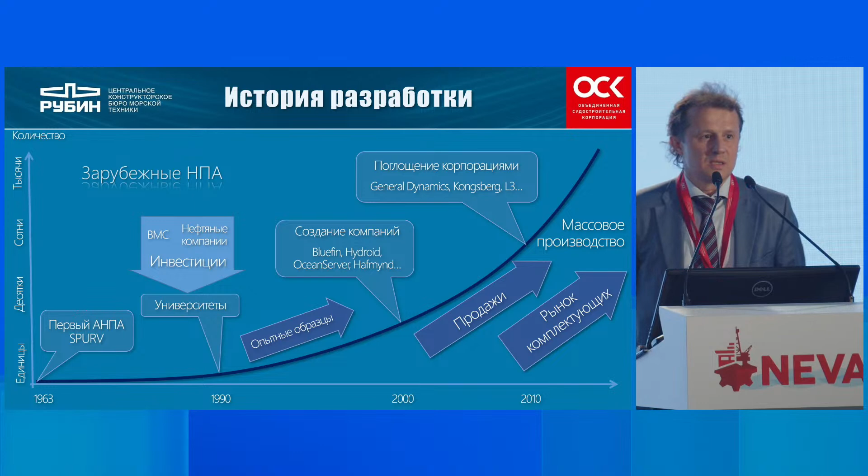And today, 30 years after, robotics in the marine industry is already a commercial industry. We have first designs, we have developments, and today those satisfy the demands of ministries. Today we've got General Dynamics, Kongsberg, that have accumulated international experience in a variety of areas. So these images are very well known to all of you. All of these facilities and machines are already in commercial production.

Likewise, in any other areas, Russia is lagging behind by a decade. Approximately, the founding father was a member of the Russian Academy of Sciences, Ageyev, who worked in Vladivostok in a respective research center. For the next 30 years to follow, this center was the only designer and specialized center for these technologies.

In the end of the 80s and 90s, remotely operated machines were developed, and some time after, when more research universities were involved, after 2010, we started to explore this topic jointly with our partners like Rubin, Electropribor, Aurora. All of those are very well present in the market already, and we are exploring technology today.

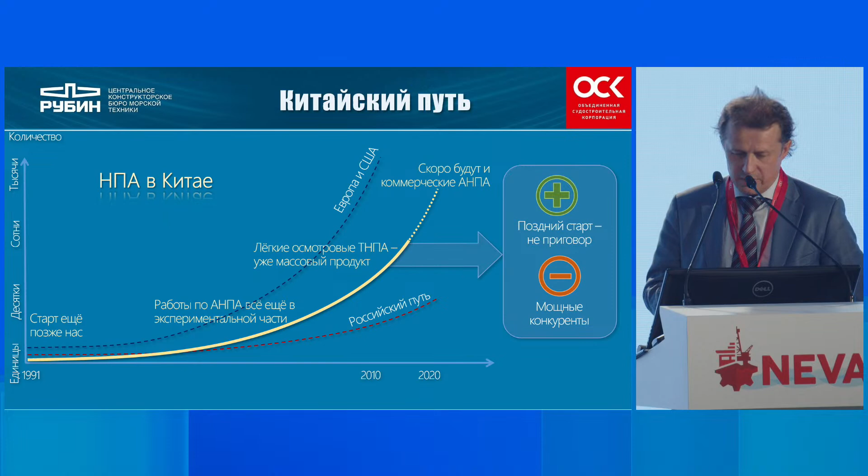So what's going on now in the world globally? What do we see now? As the previous graphs showed, everything starts from makeshift designing that then turns and expands into some kind of a commercial project. And once this commercial project expands to an industrial level, then the cost of commercial robotics is lower than military robotics, because we understand that the safety, the resilience, the robustness is different there. Therefore, the advancement of military technology versus what we used to have 30 or 40 years ago is based on commercial technologies. This is what's going on internationally.

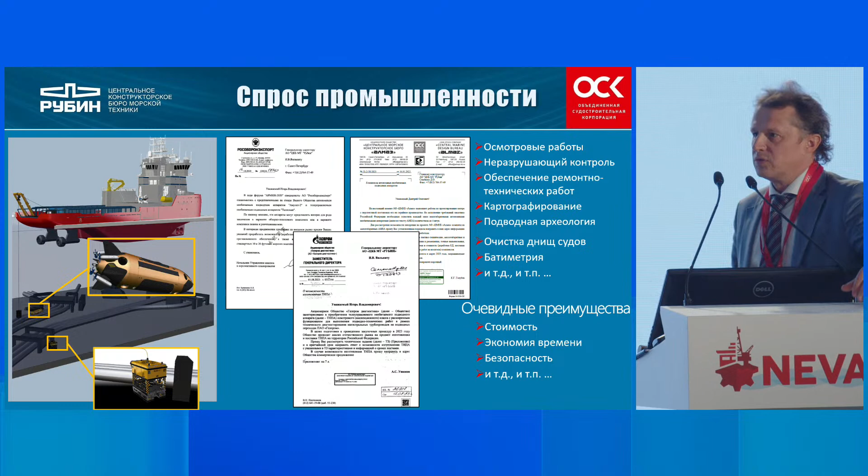So talking about civil equipment, the first demanders are oil and gas companies, and then we'll have other companies that need to service the Northern Sea Route, mapping, geological surveys. There are a lot of questions, including scientific ones, that show high demand in maritime robotics services. So the foundation has left the pyramid, and we need to seize this crisis opportunity in order to deploy this industry and create for it the foundation that was taken away from us by the geopolitical situation. The industry and the science should remain the main source of equipment of this kind.

We work hand in hand with St. Petersburg State Maritime Technical University, and we understand that when we talk about design, maintenance, and construction of this kind of equipment, our higher educational establishments don't prepare their students to do it. But in the nearest future, those professionals will be in high demand.

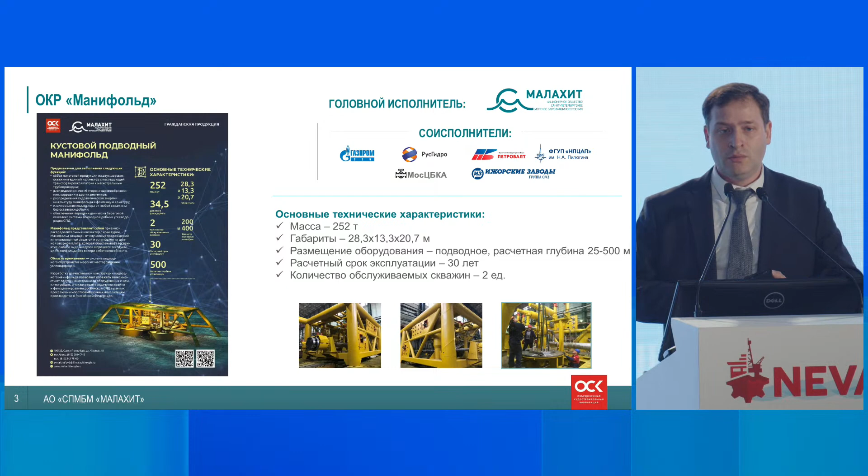And we took this look through our clients' eyes in order to understand what should be utilized underwater. That gave us a clear understanding about what the functioning underwater should look like. Another very relevant question relates to how to work with things that are installed at the seabed.

This is an example of the situation when we don't know the technology or don't understand it completely, like the first nuclear submarine. We have this heritage, but we have K-27. This submarine is placed at the seabed of Novaya Zemlya, and we need to make it safe. And in order to work on it, we need robotics.

Understanding the purpose of the marine robotics and comparing with international similar products, you can estimate the time that was required by the international companies to come up with platform solutions, which means equipment to maintain divers and the platform that should be the foundation of the unmanned submersibles. These are the dimensions. They allow to place inside all necessary equipment.

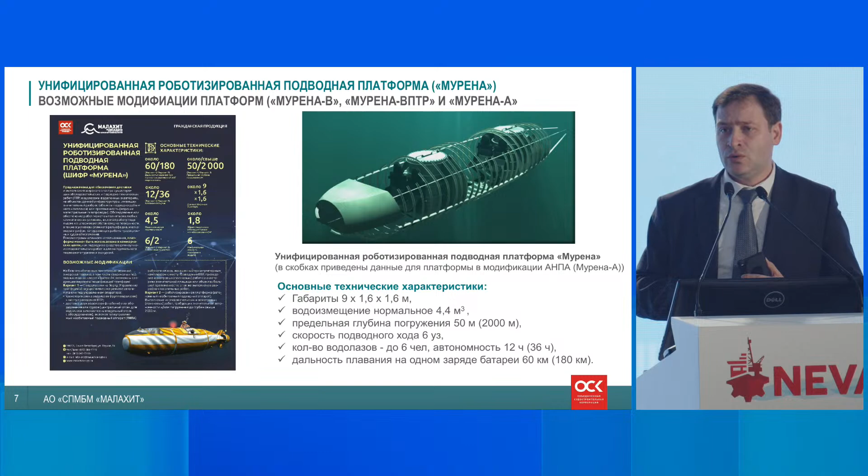Malachite took a similar path. Over the last 35, 40 years, we gathered a huge experience in terms of the creation of the platform equipment in order to maintain divers. We don't go deeper than 50 meters because a human being doesn't feel right when they go deeper. We can work as deep as 3 kilometers, and we can easily create a solution. But what makes Malachite is the understanding of a comprehensive approach.

And Dmitry asked this question, why we don't see a huge demand. The answer is clear. The client doesn't need it as a piece of equipment. The client needs a ready-made turnkey solution because they need to understand how to use it, where to maintain it. Yeah, you can buy a car, but if you don't have any roads or a parking lot, it would be very difficult to operate it. Malachite took this road by converting the machinery from something that we understand and using platform solutions, to understand what piece of equipment would be placed where.

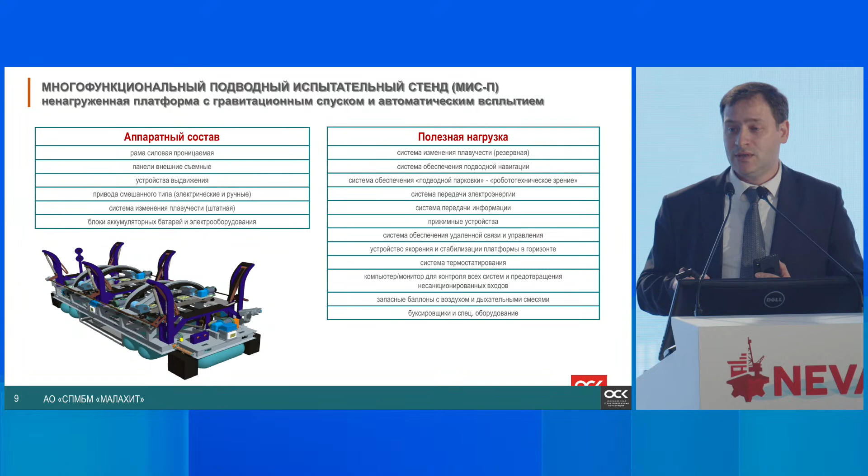Every line on this slide has behind it a lot of components and systems, and every element should be worked on separately. So after going line by line, we deep dived in every line. And on those photos, you can see industrial samples like data exchange. Okeanis is working in this field, and it was our great pleasure to see their positive results and them being able to implement connectivity systems. These systems are like our eyes and ears of a submersible, computer vision.

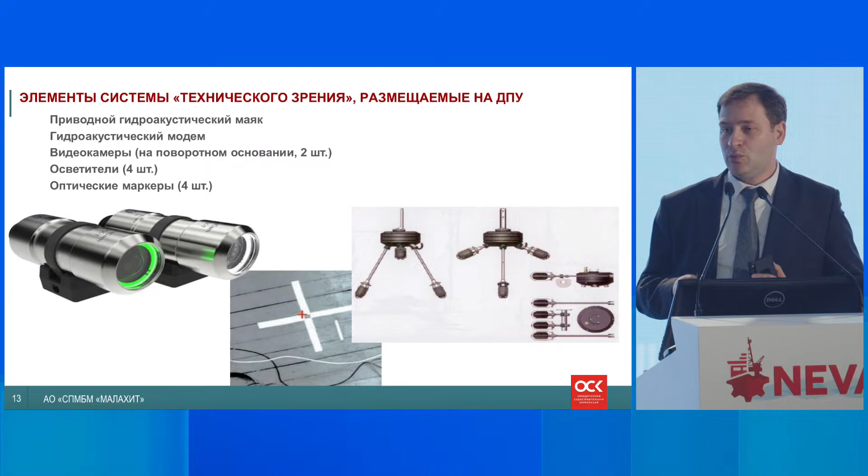This kind of equipment is present basically everywhere, onshore and offshore, summing up everything in order to accept one submersible with the size of Klavesin. The information including the dimensions is publicly available, and it is comparable with the international version. It's not a small guy, and this should be moored as well because we have equipment onshore. And I didn't mention propulsion, maintenance, utilization, but they are solvable by our company within the comprehensive approach that we practice.

This is exactly when a piece of equipment starts to be operational. So we shift from theoretical questions to the implementation, talking about the acceptance and the exit piece; these are practical results. We financed it ourselves, and within 4 years we piloted it in different seas in different regions, including the All-Russian Championship of Marine Robotics. The same approach was taken by our colleagues from other countries, so we followed the same path. We took ready-made solutions and we modernized them in order to make them unmanned ones.

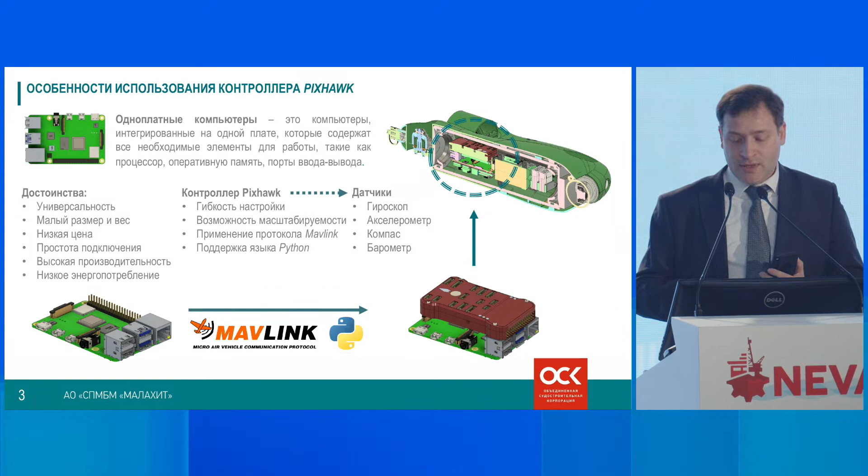Malachite financed it on its own, so it gave us an understanding of what we need in order for the brain to become operational. The results are shown on my last 2 slides, and this is what we managed to do. Just as with shore equipment, Malachite came up with a piece of equipment. It's tangible. We presented it on several occasions.

Two of its creators are Evgeny Vasilyev and Vladislav Drobatuhin. They now have answers as designers, and we as engineers together understand what systems should be integrated inside a body. If we understand that, we understand how to place devices inside, and we take a look at possible solutions of 24/7 utilization regardless of the seasons. Offshore, next to the oil and gas deposits, which means at interesting markets.

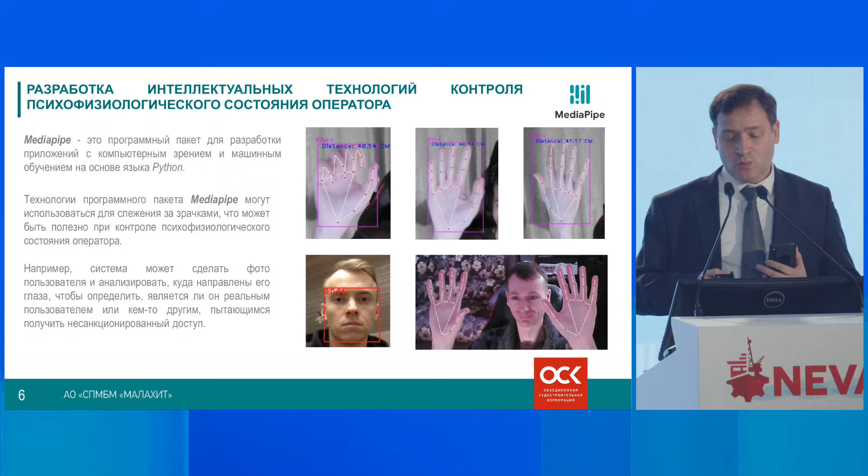So we are walking along 2 different paths, and I hope that at next year's conference we would be able to see some results, to become not only a strategic session but to be in the avant-garde of the international trends. Thank you for your attention.

Thank you for your presentation. I'd like to give the floor to Alexei Titov. He will be presenting online. Yes, I'm here. I'm here, guys. Vice Rector for Innovations and Priority Projects, Tatishchev Astrakhan University, a very enthusiastic person who organizes all-Russian competitions, and he'll be talking about surface marine robotics.

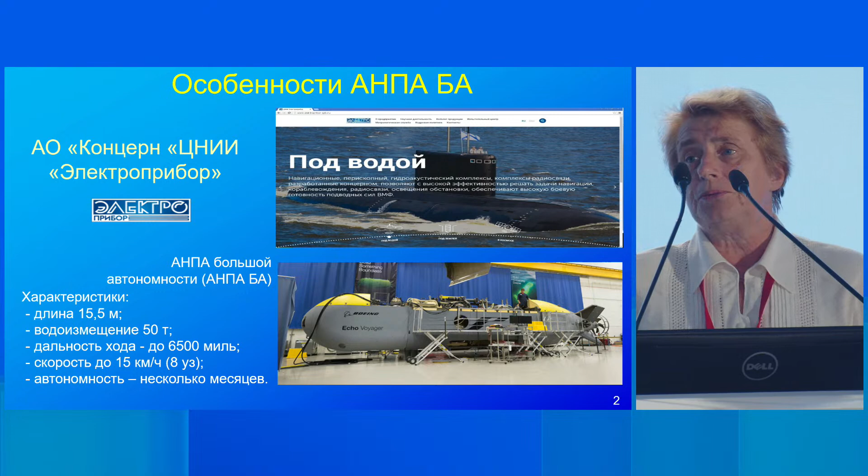Especially challenging is the ability of this machine to operate in the open sea and in harsh environments and terrains. In this respect, we believe that all sorts of obstacles, like underwater rocks and fishing nets, are a specific danger to these machines, as well as surface ice that may damage the hull of the vessel.

And on top of that, lengthy presence in cold water can result in preterm loss of charge in the battery, and thus the machine won't be able to arrive at its destination. Therefore, we have to be very swift in suggesting solutions. We should continuously assess the safety of this device and prevent a deficit of energy resources.

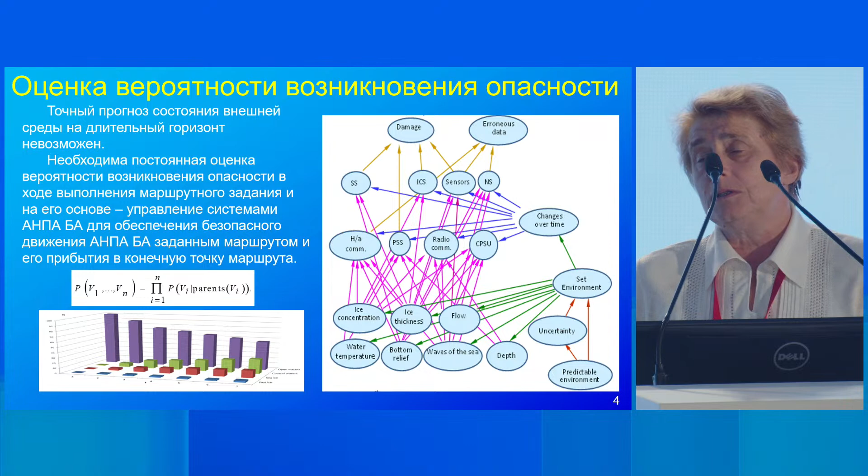In order to understand whether the external environment is safe, we should assess the operation of this device in the particular embedded environment. Therefore, we need to either reduce the energy consumption or sacrifice the capacities of this machine in terms of surveillance.

We used this machine to do our survey along the Northern Sea Route, and this is what we got as a result of modeling. Thus, we have some dependency between the incremental growth of the risk of danger and the time of operation. We used these results to adjust the machine, and this project is a joint effort by a few universities and organizations, including the Marine Technical University.

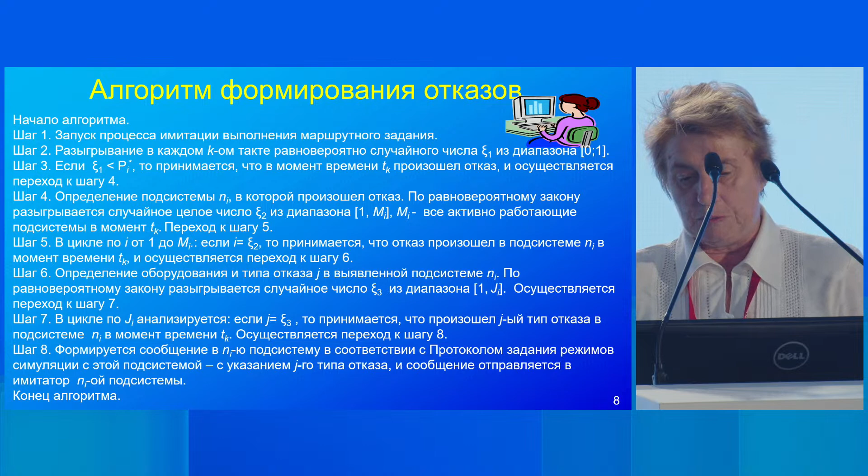Well, it's clear that the system cannot fail by itself. Therefore, we have specific thresholds that I mentioned at the very beginning of my presentation. Then we do the modeling. We model the task and the objectives for the machine. The machine is able to identify the obstacle, whether it is surmountable or not. Thus, the developers of the control system can validate the resilience and robustness of the operation of the machine and mitigate risks to ensure that the machine reaches its final destination point.

Thus, here we looked at how to operate a highly autonomous vessel. We also assessed the probability of failure and compromised resilience, and tested the algorithms. We also tested this machine on a specific rack to simulate failures.

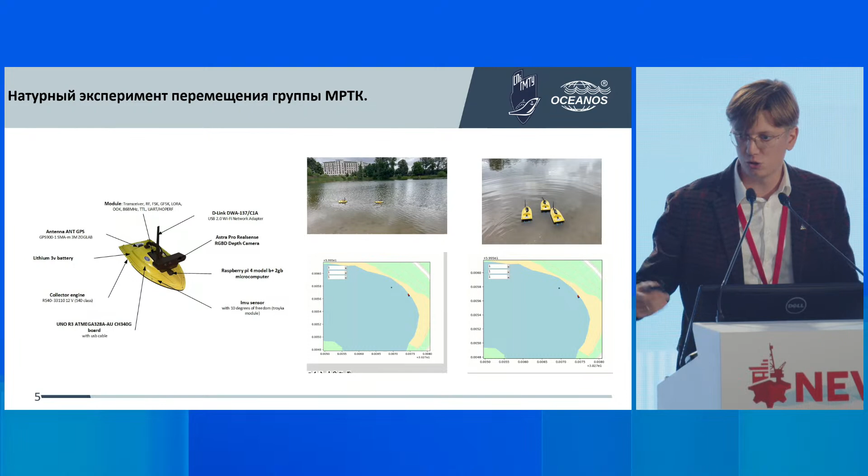Simulation allows us to develop entry data in order to teach neural networks. We can use the obtained data to have the algorithm, and this allows us to develop agents and to make them cooperate in teams. Thus, we promote teamwork. The results of our activities promote simulation modeling. These results show that these algorithms are viable and quite robust.

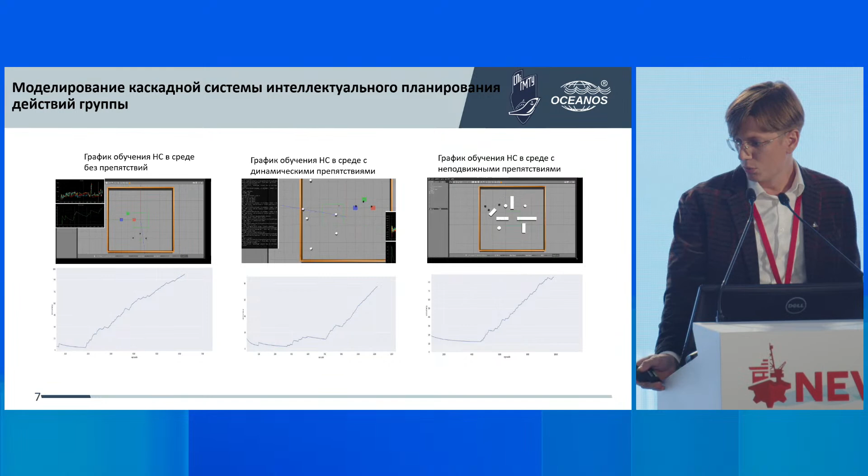The students learn how to eliminate limitations, how not to lose information, and so on. Why is that important? It's important because once we start practicing all these technologies in water, and water is an indefinite space, then it's important to have the statistics that we're going to receive.

Thus, we were able to publish a set of joint papers and to perform drills jointly with the Emercom of Russia so as to demonstrate how to use gliders to cover large territories. And within this experiment, we had to survey 3 areas, and the task was successfully fulfilled.

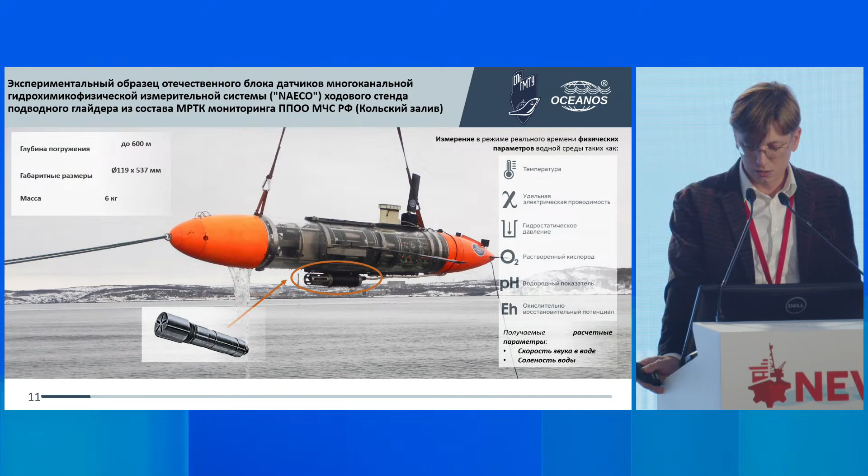Next stage was the experiment as a part of the block of sensors. The parameters that are measured are presented on the slide, like temperature, dissolved oxygen, and so on. We do direct measurement and calculations. This sensor was installed at the body of our submersible, and we received necessary results in the bay. And we worked together with Emercom.

The conditions were complicated because the area is highly stratified, very different salinity values and strong currents in the region. We tested the overall functioning of our vessel. It completed all necessary missions. We received all necessary profiles with a model of useful load. We measured also the radiation using the special edition.

Your time is up. Your time is up, Andrei.

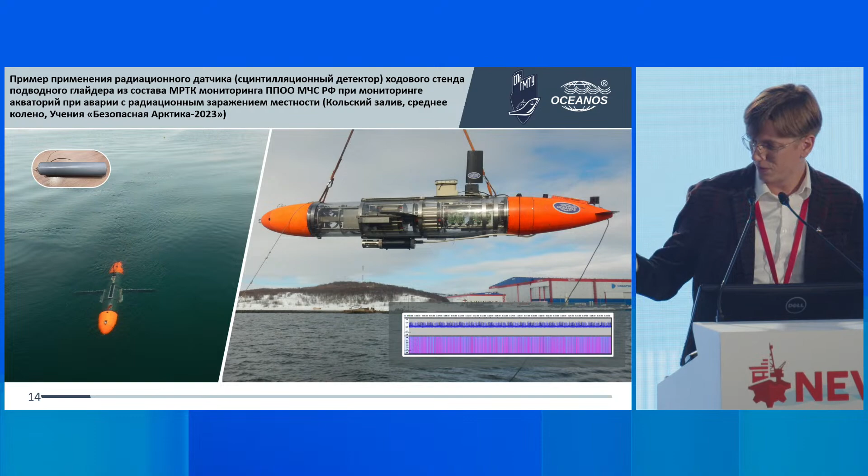And we registered that at the internal data carrier. We verified our comprehensive algorithm at their biological station. We measured profiles using the useful load model, and as a feedback, we showed that our results are comparable with their real measurement results. This is also an example of one of our works to create frontiers of patrolling.

Therefore, we implemented a lot of algorithms and functional models that were used at our unmanned vessels and full-size gliders. The software is 100% Russian, by the way, as I said already.

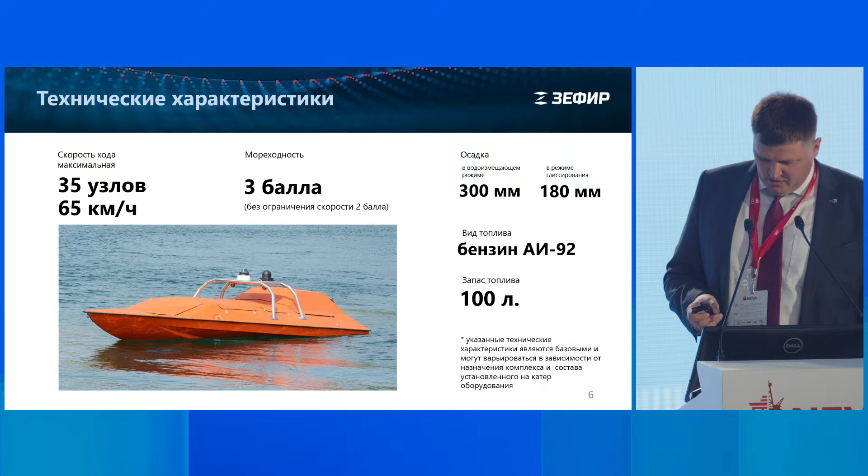So max speed is 35 knots when it carries 200 kilos. Maximum load is 400 kilos, but the speed will be lower. Sea force 3, 300 millimeter displacement. In the basic version, we have 100 liters of 92 petrol. The autonomous range is 400 kilometers, limited by gas reserves.

So we have a fiberglass body and an engine. We took a local engine from Lada. While designing this item, we wanted to make it as Russian as possible. Then it should be basic, which means we should be able to add equipment to it, and it should be cost effective as well. This is necessary in order to expand its utilization.

So we have our own water jet engine. The guidance system has been developed by ourselves, quite a large space for additional equipment. Then we have fuel compartment and equipment compartment. The body has 4 compartments. There's separate access to compartments; when two compartments have water, she stays afloat still. The mass center is lower than the water line, closer to the back of the cutter.

It's light. We transport it for the tests by a simple trailer. You take a couple of guys and you put it afloat on an unequipped shore. In the guidance system, we use AI in order to connect the dots and to execute certain missions.

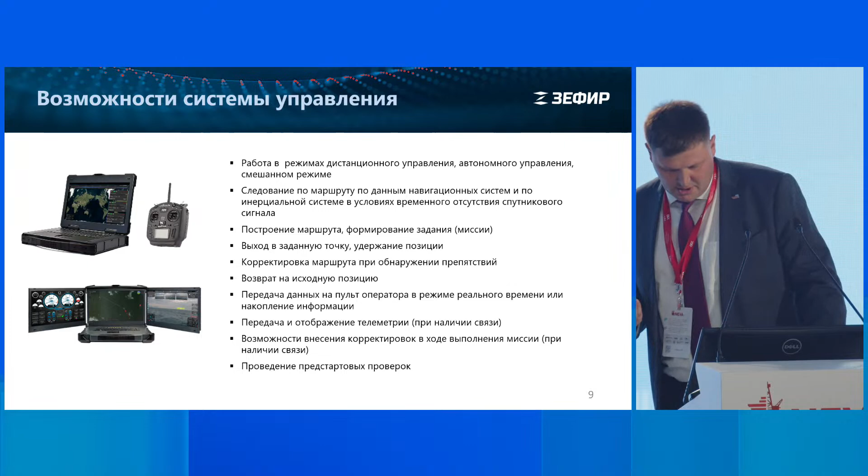So guidance system, let me talk you through it. The operator operates it, or she can go from one point to another point. Trajectory construction, stable position, return to the base, telemetry data transmission, or accumulation in case of bad connectivity, of course. Technical vision, pre-launch checks. What about connectivity?

Now on the polygons of the northwestern region and the far eastern region, we participated in the competition as well. Next time, we will use a drone in order to extend GSM; the model is clear. In case of satellite connection, we can do even better. All in all, this concludes my presentation. Thank you for your attention.

Thank you, Andrew. Thank you. Ilya Konstanty, Tetis Pro company.

Colleagues, good afternoon. Seizing this opportunity, I would like to present my company, what we achieved in the field of submersibles, and to talk you through our current focuses and development areas. In terms of background, we started back in 1991 as a vendor. For 20 years, we've been supplying marine robots from foreign companies, Subsea, SMD, leaders of the market. And we accumulated a lot of knowledge and experience in terms of the market and robot design. Starting from 2014, we started commercializing our own equipment, Marlin 350, and recently we launched RTPA 1000.

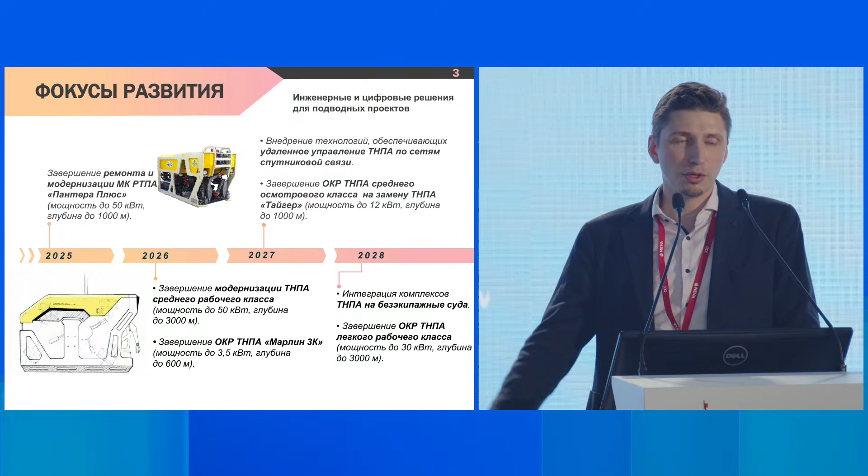Our product range will be expanded shortly. We'll produce small products with depth up to 1,000 meters. These pieces of equipment are in demand by oil and gas companies. It's like the youngsters, if you will, small working class. And we have solutions that we can suggest to the market.

Coming back to Marlin 350, this piece was created in 2014 to substitute Falcon. Falcon is the most prevalent piece of equipment on the Russian market. We delivered more than 100 items of this kind. It works at 350 meters. And this is the main piece of equipment for the Russian fleet and for the fleet of our company. We are actively developing accessories. We suggest installing systems of autonomous energy generation, manipulation complexes with several dimensions of movement and rotation, as well as different hydroacoustic systems.

In terms of the development of this item, we have planned a modernization. It will allow us to increase the power of the propulsion unit. It will make this item comply with the oil and gas companies' requirements, in terms of video quality, in terms of safety and security of the unit, and so on and so forth.

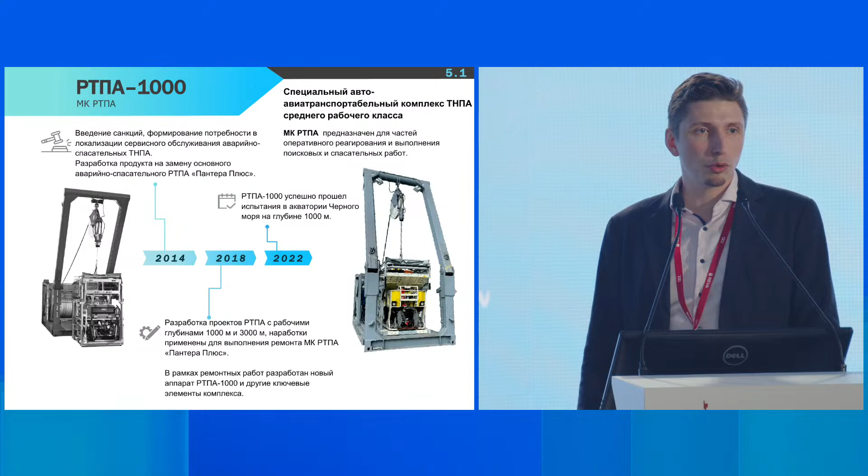Another important endeavor is the modernization of our Panther Plus, or RTPA 1000. It's safety equipment that can be transported airborne, and we shipped 8 complexes like this, and most of them have functioned for more than 10 years already. So we modernized it, and we developed a 100% made in Russia submersible apparatus. We tested it in the Black Sea at a depth of 1,000 meters, and the tests were 100% successful.

We developed Russian propulsion units, manipulation units, video, lighting equipment, as well as guidance, an electrical guidance system. This was a big job in order to improve the reliability of the equipment, because now we can isolate faulted systems. So when the equipment is deep down and one system is off, the overall equipment keeps working. We have our guidance system, as I said, video information processing systems, and so on and so forth.

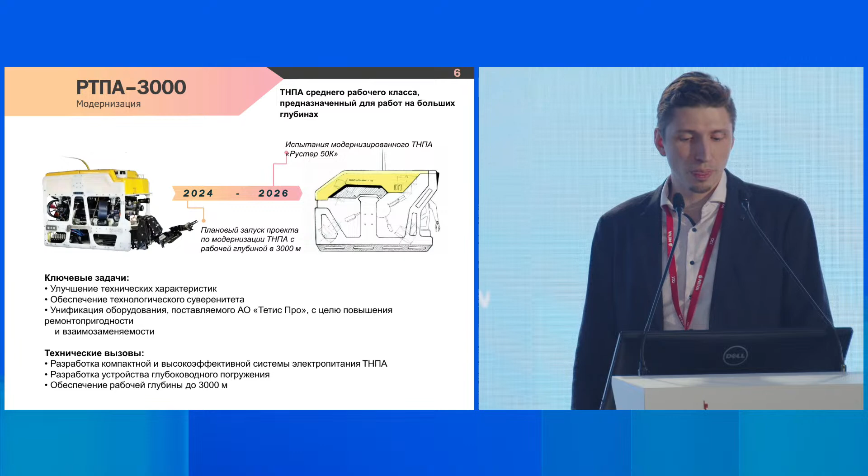In terms of future steps, this equipment is not manufactured in big quantities, and we plan to gather feedback from our clients. For instance, recently we received some feedback from oil and gas companies, and we figured out that they need more place on the deck in order to install larger units, and this is what we do in order to give them more space. We modernized this equipment as well in order to make it work deeper. We need to focus our work on improving the electric system.

Over the horizon of 2028, we see a clear interest and a need to come up with unmanned vessels, and the components of unmanned vessels. The unmanned navigation legislation is developing rapidly, and they will need to have submersible robots. This will be our future focus in terms of service and repair of this equipment.

Thank you. Thank you very much indeed. Viktor Tarasov from the Russian Maritime Register. What a subsea apparatus is. Let's talk about law.

Yes, the topic of my presentation is the development and improvement of the classification of unmanned underwater apparatus. The development of offshore oil and gas deposits triggered the disruptive growth of submersibles. And the participants, like the developers, the producers, and the operators of unmanned subsea vessels, asked for the systematization and unification of rules and legislation in order to guarantee the safe utilization of underwater vessels.

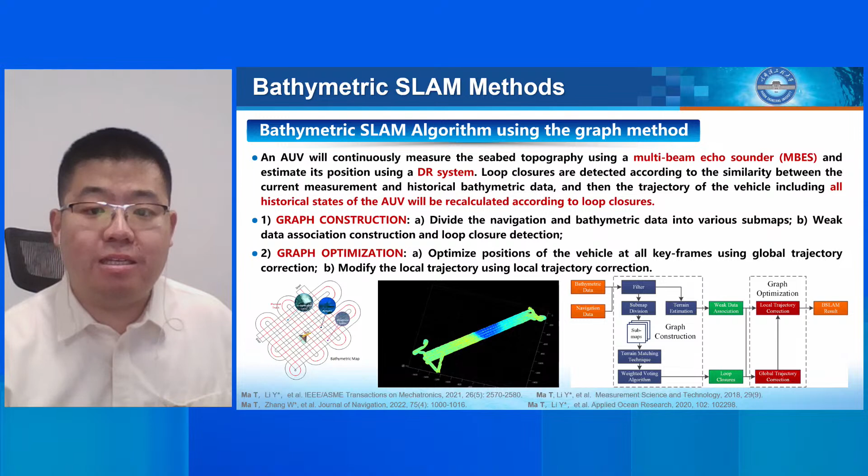In the graph optimization, we denote all frames associated with loop closures as keyframes. We optimize the position of the vehicle at all keyframes using global trajectory correction, and then we modify the local trajectory using local trajectory correction. Here are some simulation results. It can be shown that bathymetric SLAM can provide accurate navigational results for the vehicle and build a consistent map.

To identify invalid loop closures, we proposed the MCM, a robust SLAM algorithm with a greedy method. Here's how the MCM works. If the optimal map consistency exceeds a given value, one of the loop closures will be considered invalid in the current iteration. Validities of all loop closures will be recalculated when a new loop closure is detected, which means that validities of loop closures will change over time.

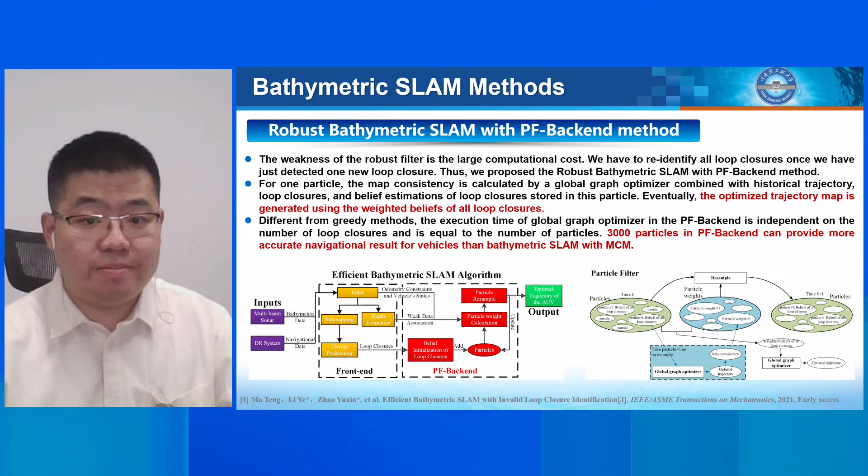Different from the robust filter, the execution time of the global graph optimization in the PF backend is independent of the number of loop closures and is equal to the number of particles. 3,000 particles in the PF backend can provide more accurate navigational results for the vehicle than the robust filter. Using the field data, we have proved that both the PF backend and the robust filter could provide accurate navigational results for the AUV, but the PF backend is more time-saving.

The final section is about our future work. In our opinion, the communication-restrained cooperative bathymetric SLAM is quite important, but very difficult. Communicating using the acoustic channel is low bandwidth, high latency, and unreliable, making transmitting a lot of bathymetric data over an acoustic channel very challenging.

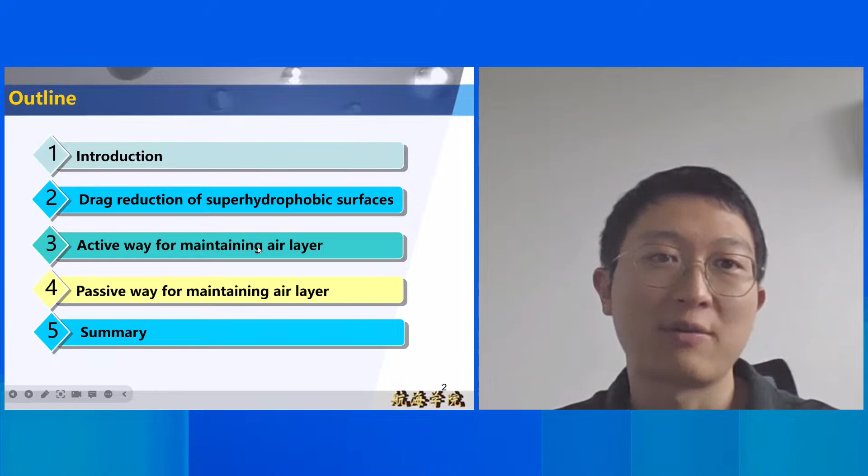Today, my topic is sustaining the drag reduction effect of superhydrophobic surfaces. My talk is divided in 5 parts, so let me start with introduction. Firstly, drag reduction technologies are of great importance for ocean engineering, as they can increase the speed and reduce the energy consumption of underwater vehicles and ships.

There's a magic phenomenon in nature for surfaces such as lotus leaf and the leg of water striders. These kind of surfaces are very hard for water to wet, and we call this phenomenon superhydrophobic. For a surface to be superhydrophobic, there are 2 criteria. First, low surface free energy, and the second one is micro and nanostructures. Based on these 2 criteria, researchers have successfully developed many methods to make artificial superhydrophobic surfaces.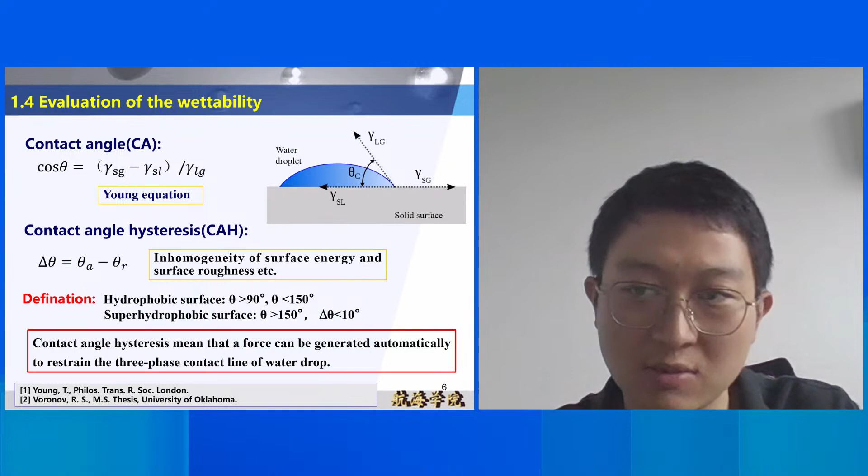Technically, a superhydrophobic surface is defined as a surface which has a contact angle larger than 150 degrees and a contact angle hysteresis smaller than 10 degrees. There are 2 wetting states of such a surface. The first one is the Wenzel state. The water penetrates into the micro and nanostructures, and the solid surface is totally wetted.

The second wetting state is the Cassie state. In this state, the water does not totally wet the surface. There are some air pockets or an air film between the water and the solid surface. It is this air layer which gives the drag reduction effect of the superhydrophobic surfaces.

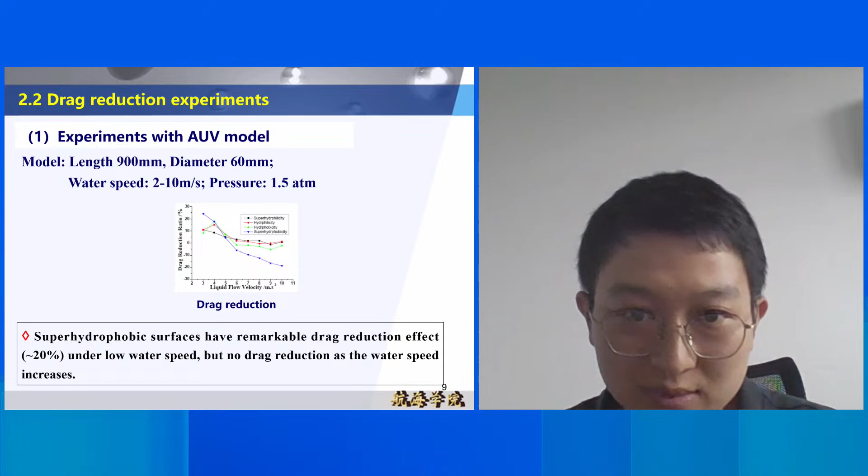Then we tested the drag reduction effect of such surfaces. We found that when the flow speed is small, there's a remarkable drag reduction effect, which can go up to 20%. But as we increase the flow speed, the drag reduction reduces and it can go negative, which means it can increase the drag when the flow speed is very high. We also tested it with a flat plate.

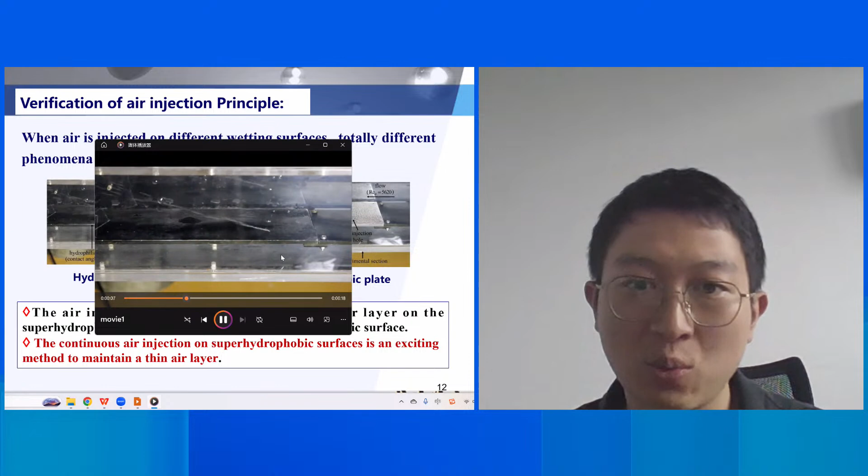While for an ordinary hydrophilic plate, it is totally different. When we inject air on a hydrophilic plate, it just flows away due to buoyancy. So this is the first way. In this way, we sustain the air layer on the underwater superhydrophobic surface. It greatly reduces the vertical strength and the shear rate on the surface and shows a strong drag reduction effect. As you can see on the right figure, we maintained the drag reduction rate up to 20% by continuous air injection.

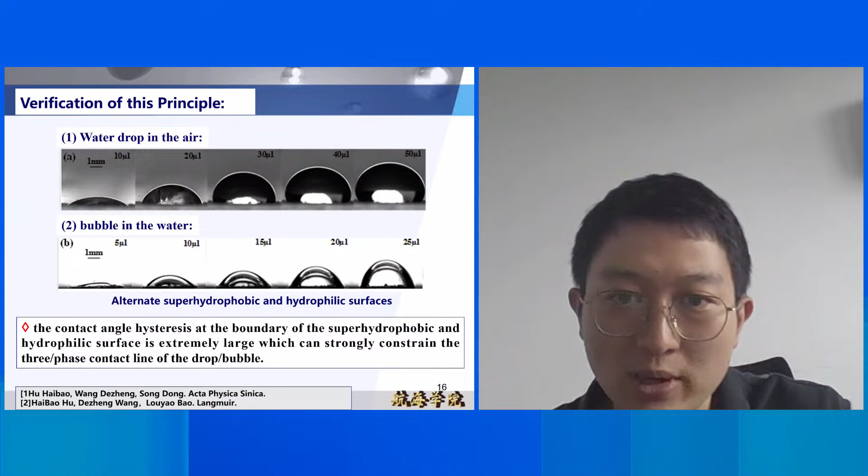We introduced this pattern onto a rotor, creating annular alternate superhydrophobic and hydrophilic strips. Then we manually injected air onto the superhydrophobic strips, so it forms air rings on the rotor. It looks like tires, but they are actually air rings. Then we tested the stability of such air rings. The radius of the rotor is 12.5 millimeters, and the rotational speed can go up to 1,500 RPM. Even at such a high rotational speed, the air ring can still sustain. It deforms a bit, but still it can sustain.

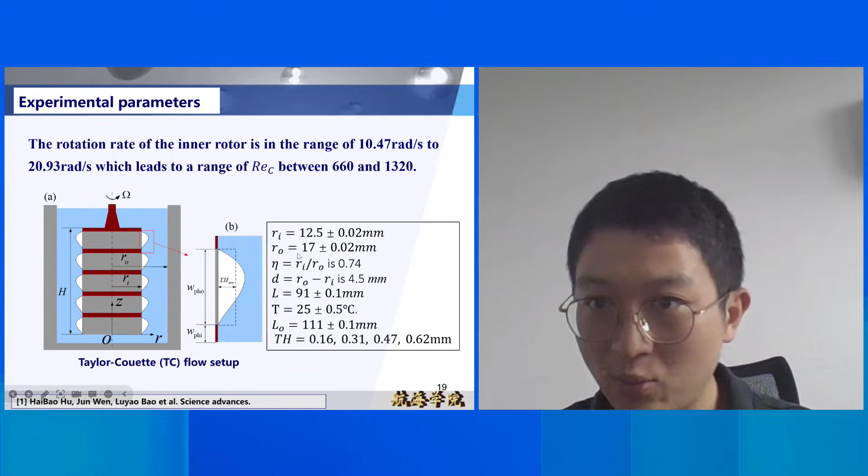Then we tested the drag reduction rate of such air rings with a rheometer. The results show that the drag reduction effect can go up to 77%, and the drag reduction increases with the thickness of the air ring. What's more, the air ring not only reduces the frictional drag, it also changes the velocity profile and the flow structures in the gap flow. These are all the results in my slides, and these are the conclusions. I'm not going to read them, but the main work in this talk is that we developed two methods, one passive and one active, to maintain the air layer for drag reduction on underwater superhydrophobic surfaces. That's all. Thank you.

Thank you very much. Спасибо. Thank you very much indeed. I would like to pass the floor to Natalia. She represents one of the most practically oriented companies, and she constantly works with different submersible equipment.

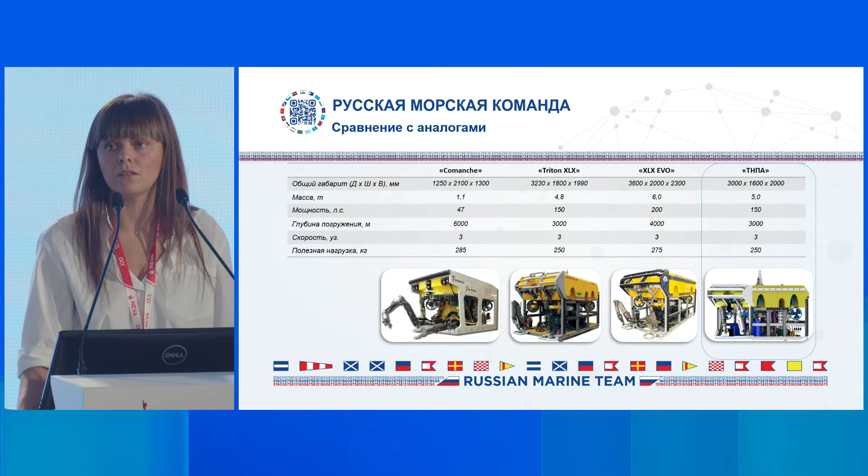First stage was the comparison of existing models of this kind of equipment. The definition of necessary characteristics. We defined the weight, 5 tons, power, 150 horsepower, 3,000 meters depth, 3 knots of speed, and 250 kilos of useful load. At the analytical stage, we defined as well main tactical and technical characteristics. We defined the critical item points and possible procurement opportunities.

Okay, the unmanned complex developed by us is dedicated to geological surveys, safety works at the depth not exceeding 3,000 meters. It has 3 thrusters of horizontal and vertical movement, 2 manipulators, video cameras, lighting equipment that rotate, and accessories that help to define all nuances of the environment, and the pressure compensation system that protects all internal items from destruction with strong pressure at big depths.

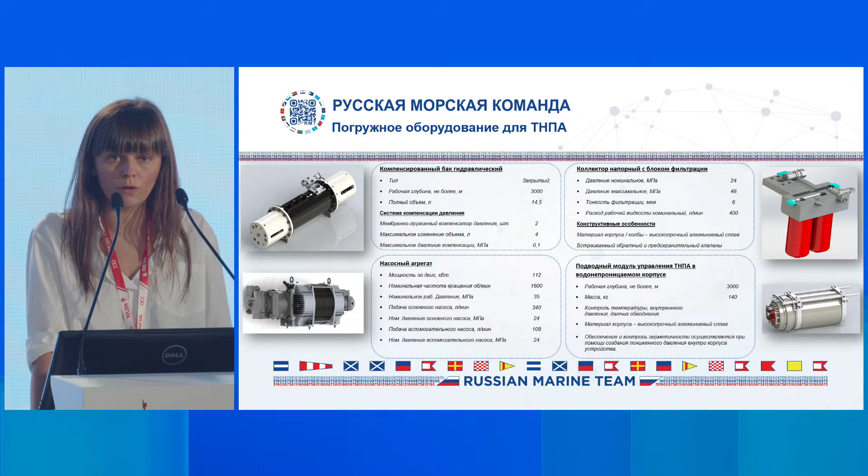As for today, we designed and we launched 3 main units of this installation. They allow to launch and move our complex, i.e. pumping unit that has 2 pumps and 1 engine, hydraulic reservoir that compensates for pressure with the preliminary connection with the filter block, and the guidance unit into water protected, or rather water safe body.

A special attention was made to the modeling of the guidance system. As for today, we created a mathematical model of the guidance that takes into account all relevant characteristics of the complex, including movement options and the impact of the external environment. The control of the functioning of this complex is performed by the operator from the shore. He or she has the route of the complex on his or her screen. We paid greater attention in order to find the delay of video signal that is being transmitted to the shore.

Design works started back in 2022, and we plan to achieve them in fall 2025 with tests, with real tests in the water. This concludes my presentation.

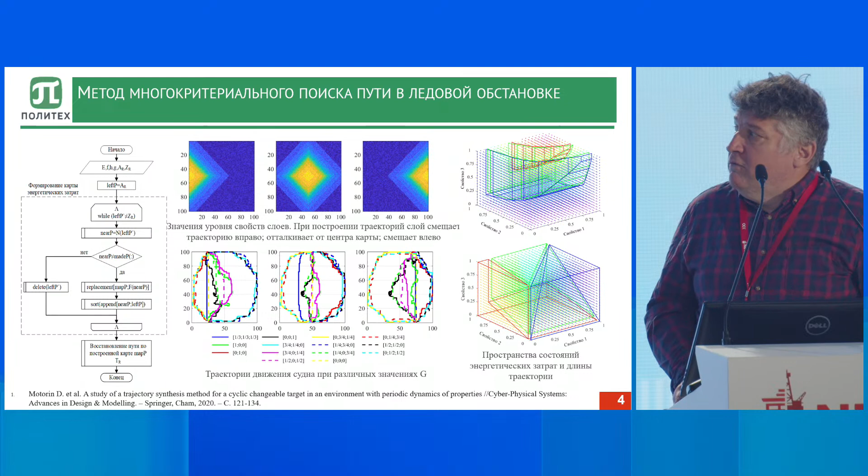To do so, we need to solve three major problems. First, multi-criteria search for navigation of vessels in order to plan operation, the avoidance of collisions in this movement, and 3D visualization based on data. The results should show, or rather construct, the path. Amid a difficult ice condition, we came up with a method. It is based on the integration of several criteria. We bring them together, and on this slide, you can see options of values of strata levels and different trajectories that could be achieved depending on the weight of each method.

To avoid collisions, we implement the method of ship divergence based on the navigation rules. An interesting peculiarity of this method is the distribution of opportunities of navigation by decreasing the ship's velocity, but also by changing her trajectory.

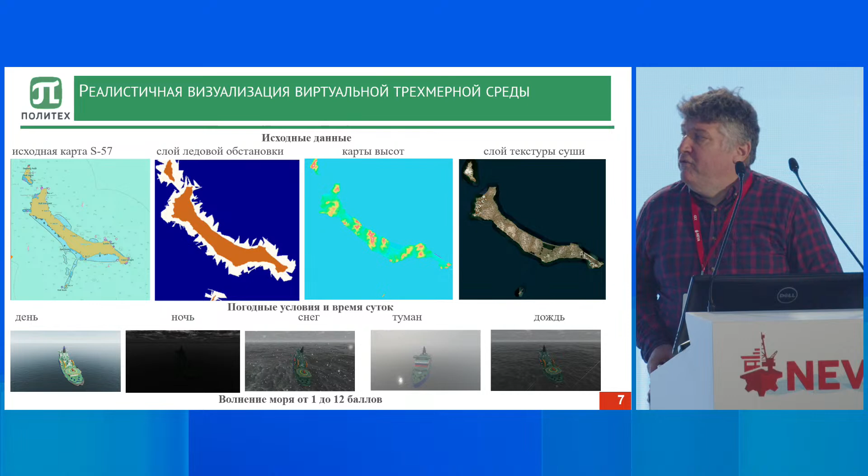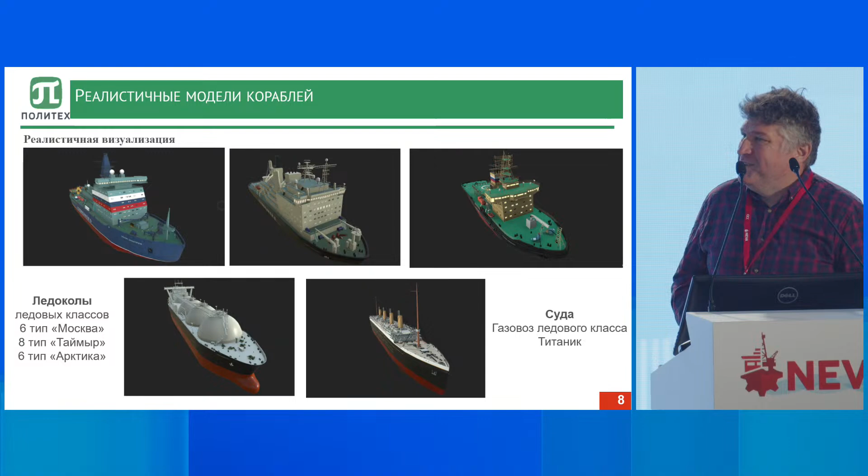To plan the operations, we use different meteorological conditions, day versus night. We factored in rain and snow and mist. We can imitate bad sea based on the 12-point scale. For the visual identification, we built in ship's models. These are high polygonal models. We have an icebreaker, a gas carrier, and we have also Titanic, but it was just a joke.

The IT system is a distributed calculation medium. It has a visualization component, a calculation component. It gives a 3D visualization and the system has also a calculation server. Our software is an open code-based software. We use the open software as well. The calculation server works at the heterogeneous cluster of our supercomputer calculation center.

To give you an example of the visualization of the milieu, it is capable to create collision-free trajectories amid a complicated ice situation. In the future, the system could be integrated into an on-board IT system. Its main goal will be the systematization and the optimization of the raw data required for the successful visualization. Thank you very much for your attention.

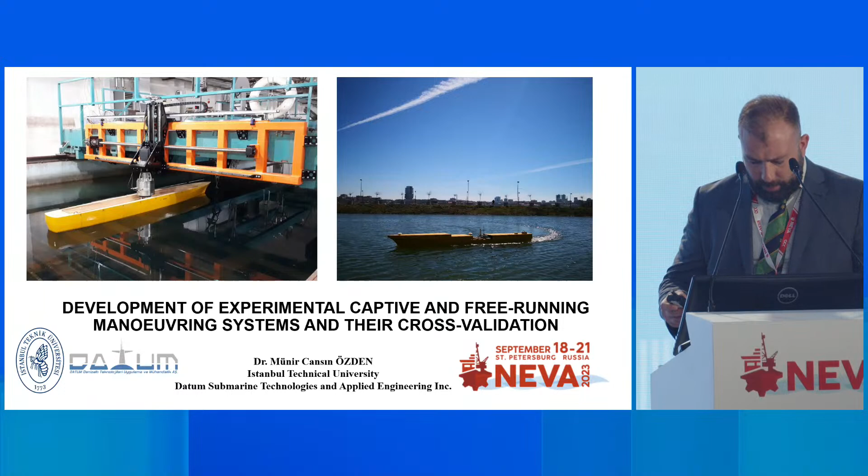I will talk about two different experimental setups which we developed in Istanbul Technical University. Is this? So our motivation was to develop two different maneuvering setups, and this project was financed by our Presidency of Defense. The first system is a planar motion mechanism, and the second system was a free-running maneuvering system.

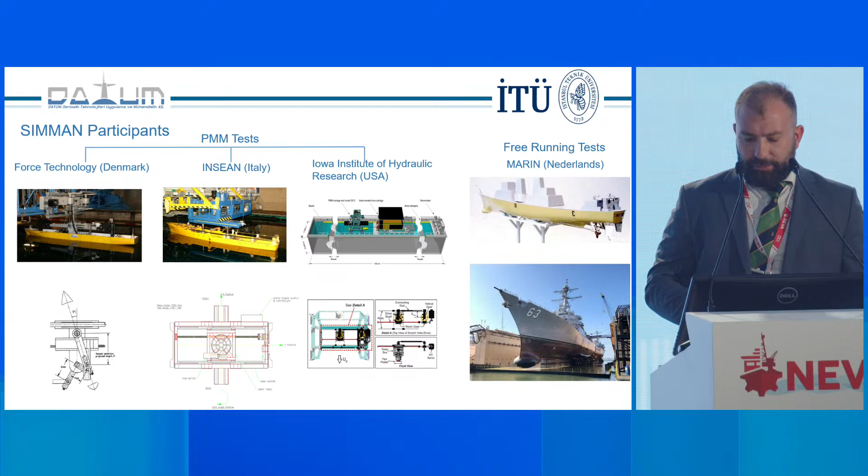We developed both systems in our university, and we compare our results with the SIMMAN participants. There were three different planar motion mechanisms in this conference, and one free-running system. Denmark, Italy, and USA were planar motion mechanisms, and Netherlands MARIN was the free-running system. So we developed our own system. It is quite modular and has very large amplitudes in comparison to the Scotch yoke mechanism, which the other institutions have.

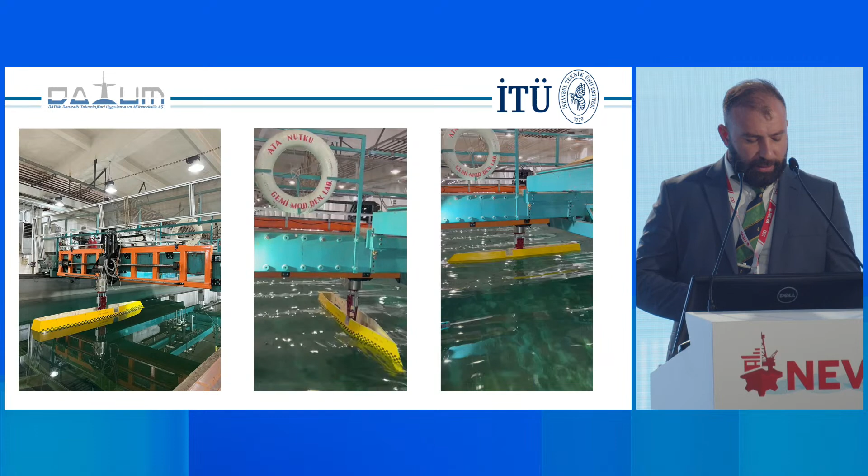And the second part was a free-running maneuvering system. We developed both systems, and we made the benchmark studies on the Arleigh Burke class frigate, DTMB 5415. So we made the same experiment on a small model on the planar motion mechanism and the same experiment on the free-running system. The free-running system, although you see a remote control here, is semi-autonomous. So we input the experimental parameters, and the model does the experiment by itself and collects data, which includes a mobile unit and a shore station.

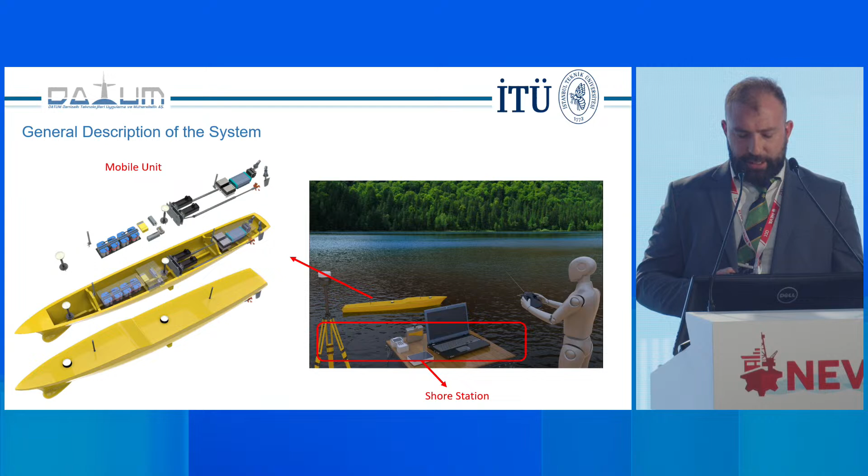The model is quite large, 5.7 meters, but the system is very modular inside it. Here you see the control and data acquisition software. One unique thing about this system is it is GPS synchronized. It means we get PPS signals from GPS, and we make it a 10 hertz signal and use it as a hardware interrupt for data collection, which means we have signals at 10 hertz, and we collect all the data from propeller servos, rudder servos, heading, GPS position, etc. And after the experiment is finished, we already have the results in our computer.

Here you see a turning circle experiment we are conducting on the DTMB 5415 model. With the planar motion mechanism, we did experiments for 3 different Froude numbers. One was slow, one a medium speed, and a high speed one. And after doing these free-running experiments, we simulated our results from planar motion and compared them with the free-running experiments. And here you see a zigzag test. So the model makes the test by itself. And it is a lake in our university campus.

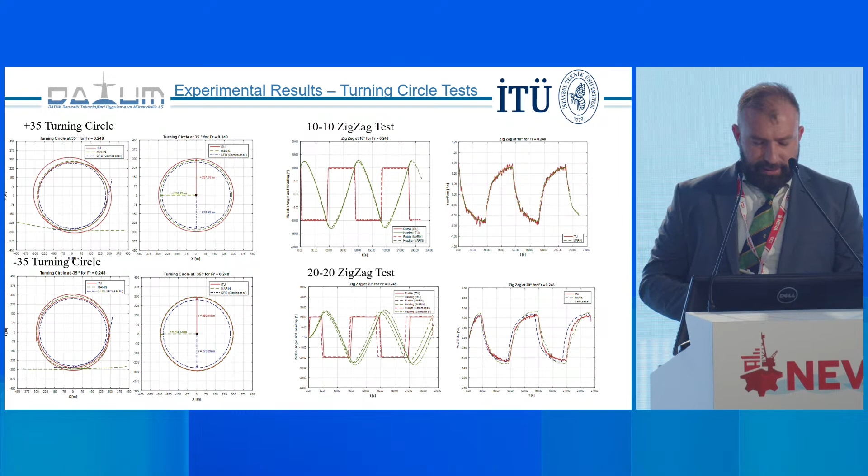We got very good agreement with MARIN. We think actually we did even better than them, because as you can see, with the 10 degree zigzag, there was some problem with their results. And these are interesting figures. As you can see, the green dashed line is the slow speed. Our results are non-dimensionalized, so the derivatives we got from slow speed are also non-dimensionalized, and they should be independent of speed. But our results show that if we don't do the test at a high speed, then the slow speed derivatives are useless, as you can see in red and green lines. But the orange line is the high speed, and it shows very good agreement with both 18 knot and 30 knot free-running results.

We used this experimental free-running setup also on a European Union project called GATERS. Our free-running system was assembled in just 5 working days on this model, and we made the experiments. Here you see a conventional rudder and a gate rudder. As you can see from the photos, a gate rudder has 2 parts and can turn almost 90 degrees to close the propeller and 15 degrees on the negative side.

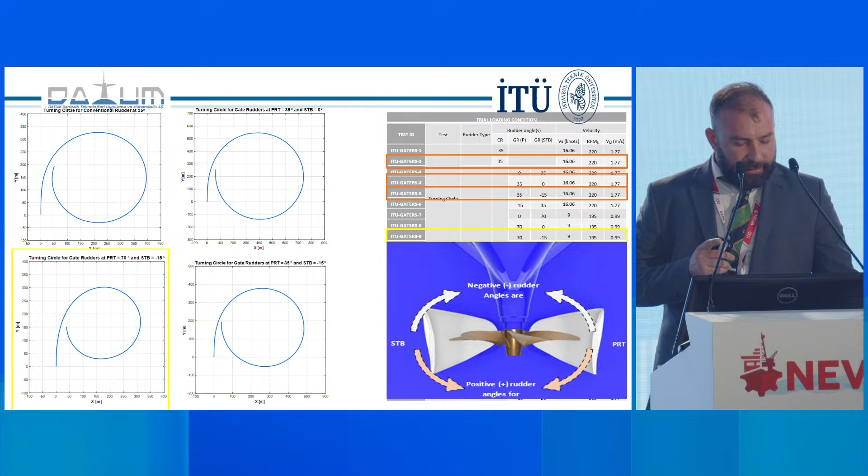So as you can see, on the left top, there is the conventional rudder case. On the right top, there is the gate rudder case, but only one rudder is turning. And on the right down image, you see a gate rudder. One of the gate rudders turns minus 15 degrees, and the other turns 35 degrees, which has almost similar results in comparison to the conventional rudder. But as I told, these gate rudders can have much more turning angles than conventional rudder.

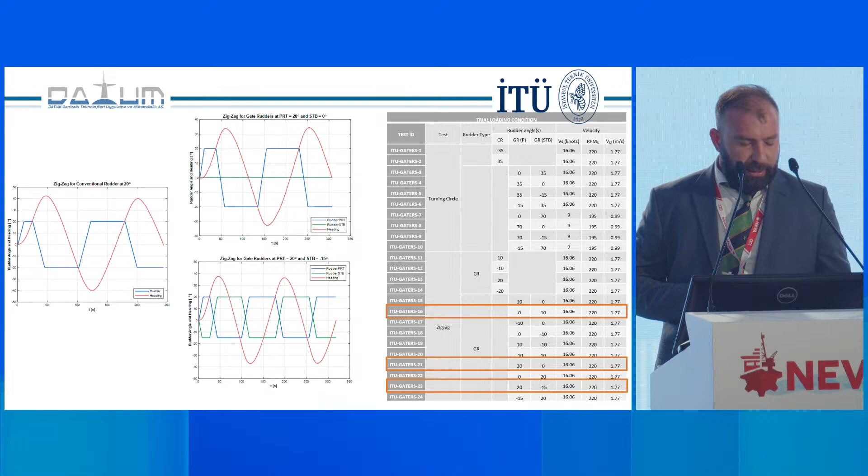But it shows itself better on 20 degrees. So again, the overshoot is quite less with one rudder moving in comparison to conventional rudder. But the period is also large. But while two rudders are working simultaneously, the period is good, and the overshoots are even better than the conventional rudder. So here are some conclusions which summarize our studies. I don't want to go on them.

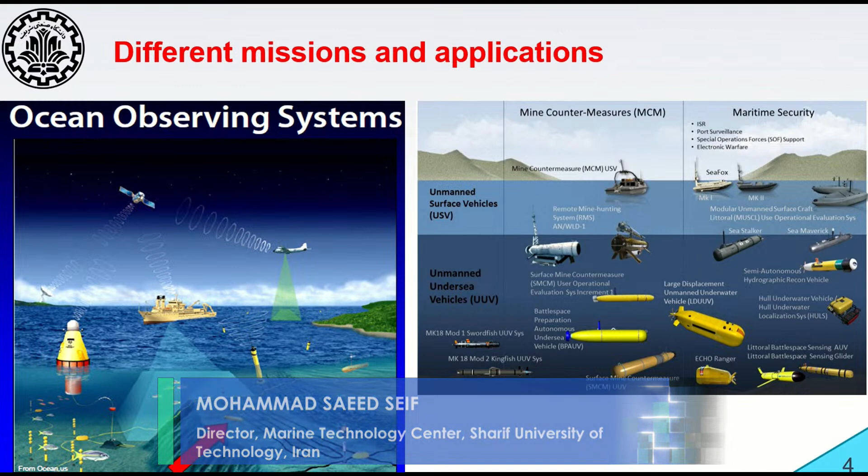Underwater exploration is facilitated by underwater robots, and today they are categorized into various classifications. The application of these robots includes seabed investigation, research, observation, and many other tasks. Underwater robots are categorized into groups from a control perspective. These categories include ROV, AUV, and gliders. Underwater gliders are one of the main categories of underwater robots. Underwater gliders are very popular for extended endurance caused by low energy consumption.

And the second section is basic idea. Gliders include two wings for thrust generation, which are helpful for decreasing energy consumption. This type of robot doesn't have any propeller for propulsion and moves by internal actuators. This type of robot has a zigzag-like motion. The buoyancy tank starts to fill near the surface and at the desired depth starts to empty. Then the glider begins ascent and descent motion. The pitch system adjusts the wing angle of attack for optimization of performance. So, glider actuators are started when they are near the surface or desired depths.

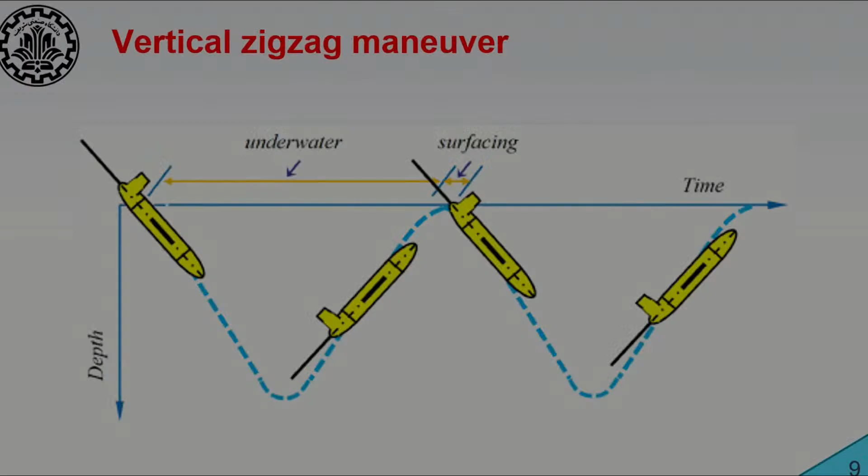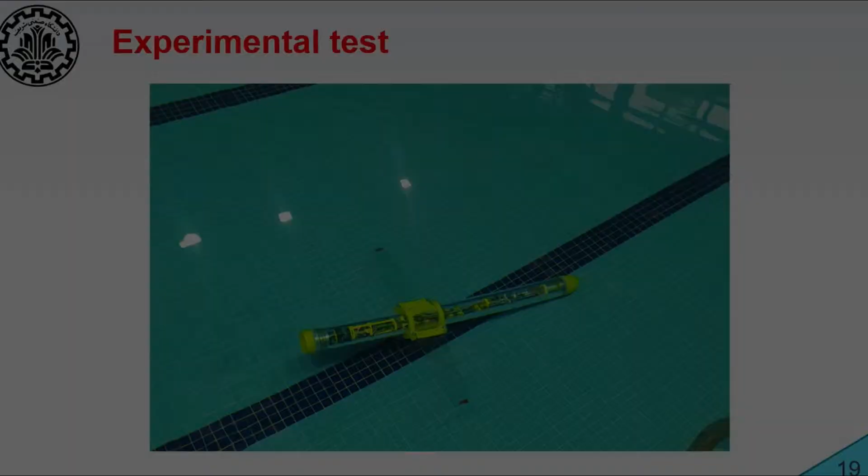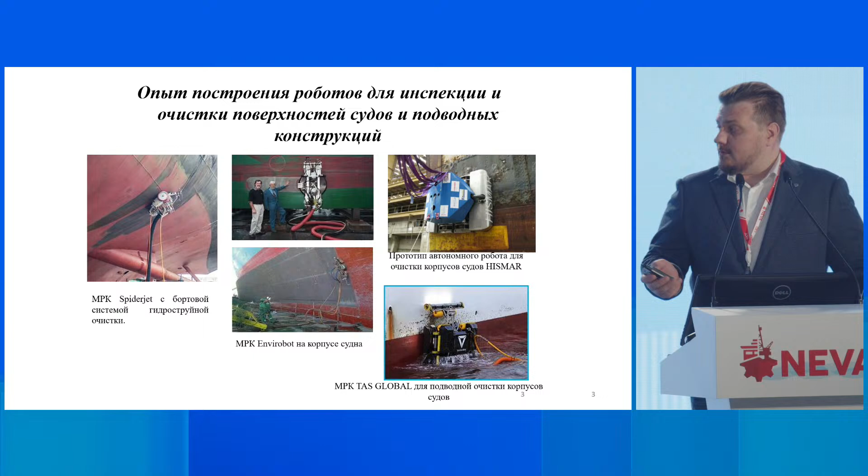We analyzed, and yes, we are very regular participants to such conferences. We have heard many times about the importance of this problem. Currently, the cleaning is done by divers. This job is quite dangerous. So we used several ideas on how we could do that in the future, and we analyzed all the options. Some of our designers participated in these projects, and we analyzed advantages and drawbacks, which I'm going to talk about today. I'll try at least.

As a result, if we speak about the cleaning of the vessel hull as opposed to international technologies, our solution allows to clean the hull outside a dry dock, which means during loading and unloading. And on top of that, you can do the cleaning of the vessel while underway without actually coming into the harbor. It is possible to clean the vessel on both sides, and ultimately we've got lots of advantages. This system allowed us to resolve a number of problems.

Those were the development of specialized models that allowed us to assess dynamic characteristics, considering that the drone can operate in both environments, both under surface, and this technology is quite autonomous, and this allowed us to resolve diagnostics, controlling. Well, actually, we also implemented AI to detect and decipher the condition of the surface to be cleaned. These tasks regarding movement and stay are also resolved. Here we use pneumatic or magnetic systems as well as combined systems.

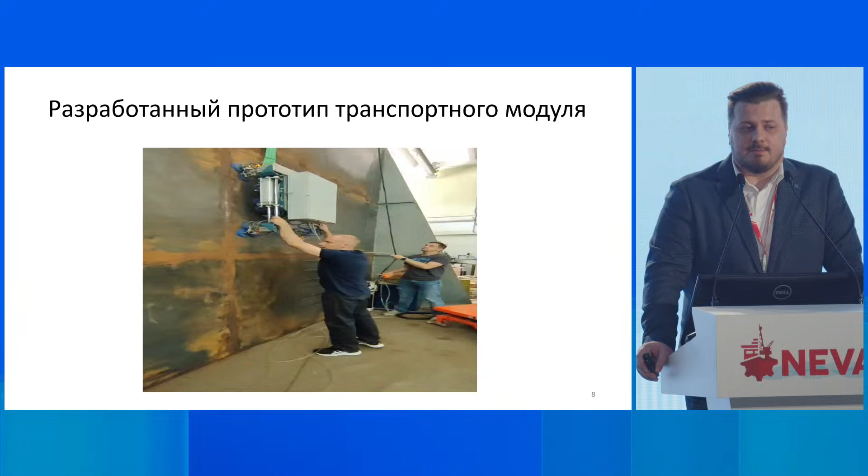This is the example of our test sample. We have our testing wall at ITMO. It moves, it functions. Talking about this solution, this is a development prototype. We use water jetting or high-pressure water cleaning, but from the environmental standpoint, it's not the best option. Well, water is the best option, but not sand, because sand jetting can be applied as well.

Gazprom Neft ordered this from us, as well as Gazprom Neft Shelf. We developed an item to clean pontoons at the Prirazlomnaya station. It's a fixed oil development rig. Once again, this item allows cleaning of the hull with different curvatures that should be avoided by the machine. In case of caissons, we need to overcome 90-degree angles. For this, we developed a specific configuration.

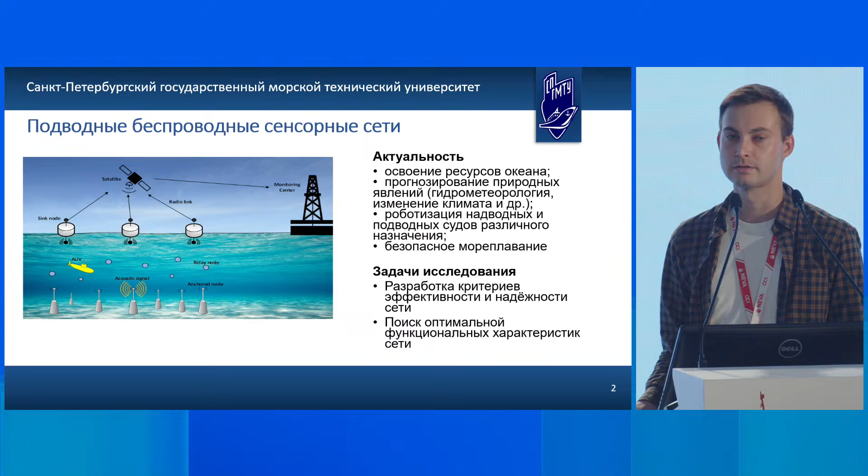Colleagues, good afternoon. Our presentation is dedicated to the characteristics of underwater cable-less sensor grids. This is quite a relevant topic because sensor grids start to be used almost everywhere. For instance, to monitor certain environmental values underwater, to follow up commercial ships for other tactical reasons, and for many others. Within our studies and our developments, we had a lot of tasks, like, for instance, to come up with a set of criteria to evaluate the efficiency and reliability of the system, and to come up with certain recommendations on how to deploy these grids.

It's common knowledge that underwater, normally an acoustic connectivity channel is used, because optical, electromagnetic, and radio types of communication don't penetrate well through water, so they are not adapted to that. Acoustic channels, however, are more reliable. Nevertheless, they have issues that we need to work on, and we integrated and factored these issues into our models.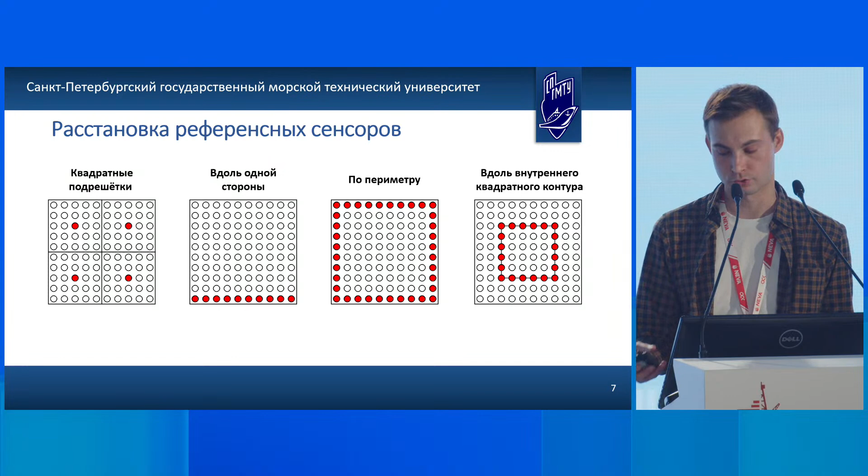Here you can see several examples of reference sensor positioning. We had 4 cases. Every case has been evaluated and conclusions have been formulated. It's a wave glider, which means the glider passes over sensors, so its trajectory either coincides, if it's perimeter positioning or line positioning, or the glider will have this serpent movement between different dots.

We came up with analytical results for the grid. On top of that, we added a simulation, which means computer modeling. Some examples of analytical results are presented here. We analyzed larger and smaller grids in terms of number of sensors, and we found an optimum position of reference sensors. We saw that for little grids, the best positioning is along one side. Actually, for the big one, it's the same.

Simulation modeling has been performed as well. We invited our students to participate. It's an option for them to participate in a project and to use this information to write their bachelor's thesis. So we compared the simulation data and the analytical data, and they were completely the same.

We searched for an alternative positioning of sensors and an alternative movement trajectory of the glider. For instance, we set up that the glider should follow a route with a certain length, but this route should be looped. And thanks to several parameters, we came up with an optimal trajectory.

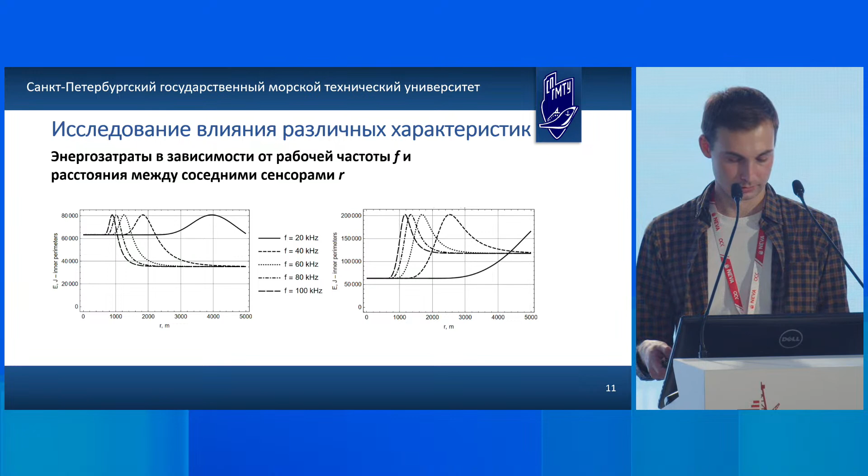The follow-up task was to assess the impact of technical and topological characteristics, which means the working frequency and the distance between sensors. These are quite interesting results, and they are easy to explain. But this is a work in progress. Another task was set.

We need to figure out the optimum number of sensors for a specific aquatic area. Here we can see the energy consumption in relation to the predefined number of sensors. If it's a big distance, we have a low probability of message transfer, and therefore there will be a lot of expenses in terms of resending messages. So the optimum is somewhere in the middle.

Our current work includes the following. Keep studying the influence of technical parameters on the grid's functioning. We want to evaluate energy consumption with a predefined rate of lost messages, which means combining two criteria, and to show their interdependence. We want to keep working with the simulation models using a genetic algorithm. We need to take into account collisions while transferring packets. We need to look at the uneven probability jump and the irregular positioning of sensors.

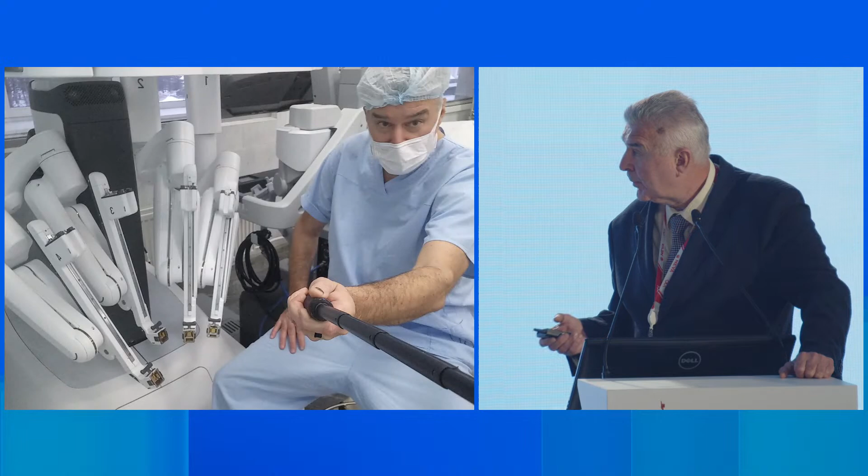If we classify existing robots based on their level of subjectivity, we separate them into three categories: Pro Robota, Robota Vera, and Robota Magna. Robota Magna needs to have 100% subjectivity, which means it needs to have an artificial intelligence. But we don't have them yet. Why medical marine robotics?

Heraclitus used to say that war is the father of all things. For us, the sea is the father of all things. Marine robotics was the third to emerge. This is a so-called Da Vinci 5.0 robot. What was the purpose of the first robots, Da Vinci-like?

The U.S. Navy, 40 years ago, had the first startup when they tried to do surgical interventions aboard the submarine. In order to keep the submarine concealed underwater and not transport the injured person, they tried to do it on board. So a startup tried to guarantee manipulations remotely. It was not possible. It was a failure because they had no possibility to transmit information.

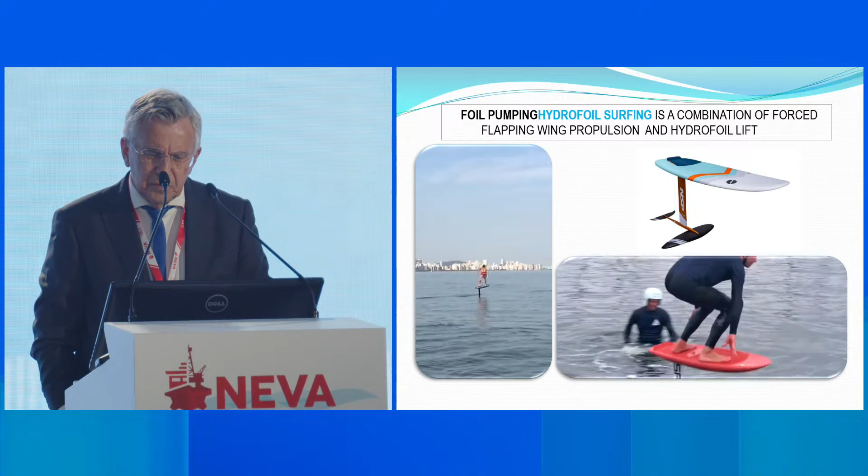I'm going to talk about the concept of a marine robot based on the principle of pumped hydrofoil. These are the principles that Armen Belkanyan and myself would like to elaborate today. What you see here is very well familiar to us all. This is water sport, a very popular one. And look what it is like.

It's a surfer board on a specific shaft, and it is joined to the tandem device. So a person jumps on the board and starts pumping it. Well, you need some skill to be able to do that, but if you master this technique, you can just float above water without going down. So we decided to make a robot based on this system.

This is kind of a system that should establish some kind of a force. And this force originates from the tandem technology. And on the other hand, there is a dynamic weight support. This is what we had to consider when developing this model.

So here you may see what this technology looks like. This rider makes two types of movements. There's the vertical tilting and the angle of attack. So you can see that there is a combination of oscillations. There is only one mode, and there is the cruising mode, which corresponds to equality of thrust and drag.

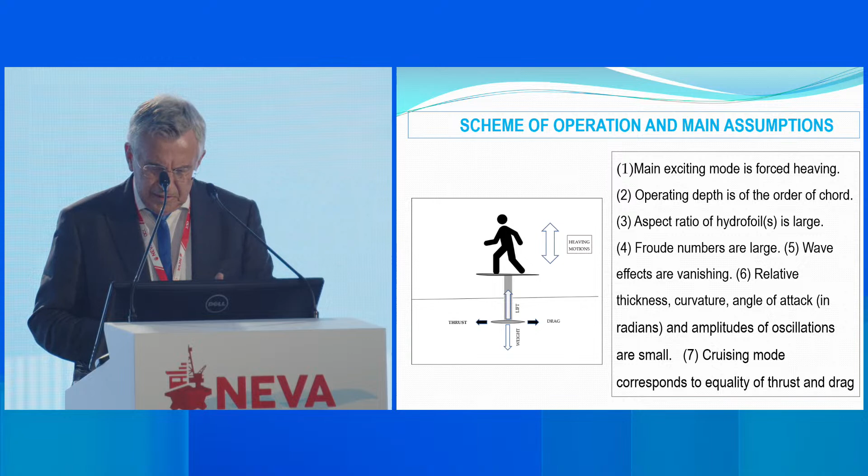And you can see that the wings are spread in order to create the dragging force. The Froude number is large. This is the relative velocity divided by square root gL. At such Froude numbers, you may somehow disregard the angles. And you see that the cruising mode corresponds to thrust and the drag.

When we do the pumping, there is damping and there is inertia. And these two parameters depend on our motion. And the second is the pumping itself, the tilting of the board. Those are very important parameters. Quite often you do not consider the dynamic sustaining of the weight.

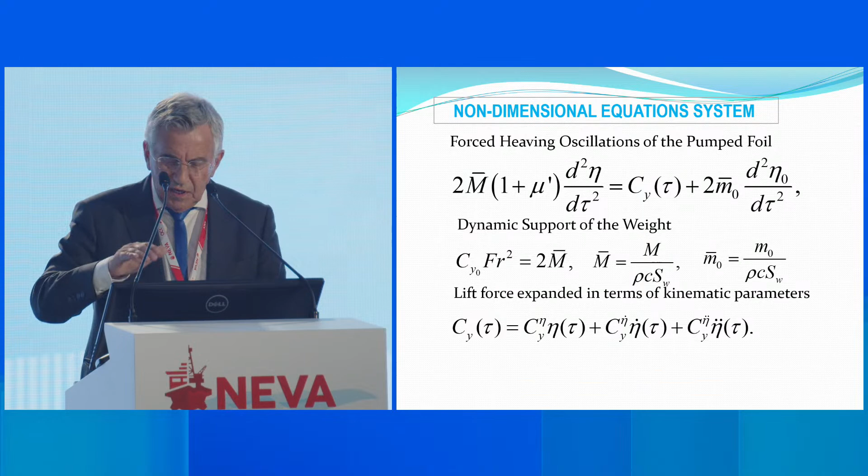And all of a sudden you have the non-dimensional equation system. You can see the forced heaving oscillation of the pumped foil. You can see the dynamic support of the weight and the lift force expanded in terms of kinematic parameters. Well, here we may have the geometric parameters. And look what we have.

And ultimately, here you can see the delta. Here you may have just an analytical solution. And you can see the overall effect. If it moves from beneath to the surface, there is a self-stabilization effect, and it was very smartly used by Mr. Alekseyev. And here we can see this effect playing the key role. It plays the key role of a spring. And if everything is done correctly, the rider would not sink into the water.

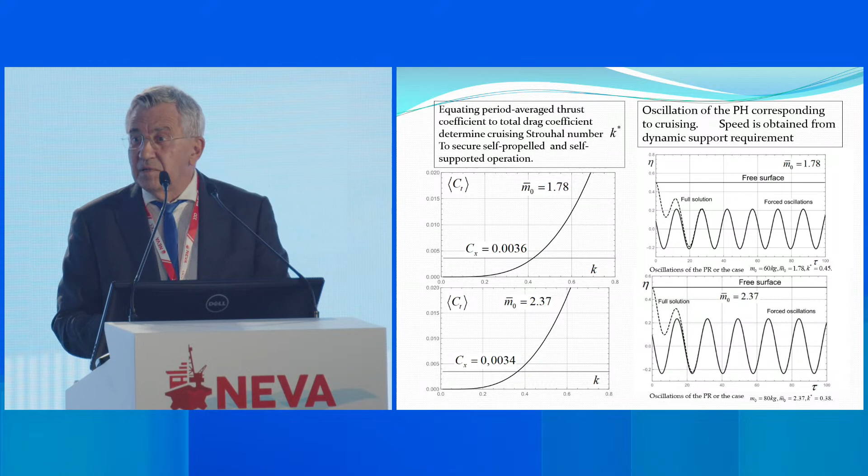Well, we looked at practical parameters, specific equations, and all those are available in the market. How do we calculate the relative frequencies? Well, we can calculate those if the thrust is equal to the drag. Then we can find the frequencies. To the right, you can see how the spring-like movements start and then oscillation starts. The oscillation amplitudes are exaggerated here.

And I've got just some numbers here for different rider weights. So this equation allows you to use the Strouhal numbers and identify the velocity that is required to sustain movement, meaning that it's from 5 to 7 meters per second, but the frequencies are quite high as well, 2.7 hertz. That's quite a lot. So like the previous speaker said, it's very difficult to pump it. And the record was 30 minutes. That was the record number.

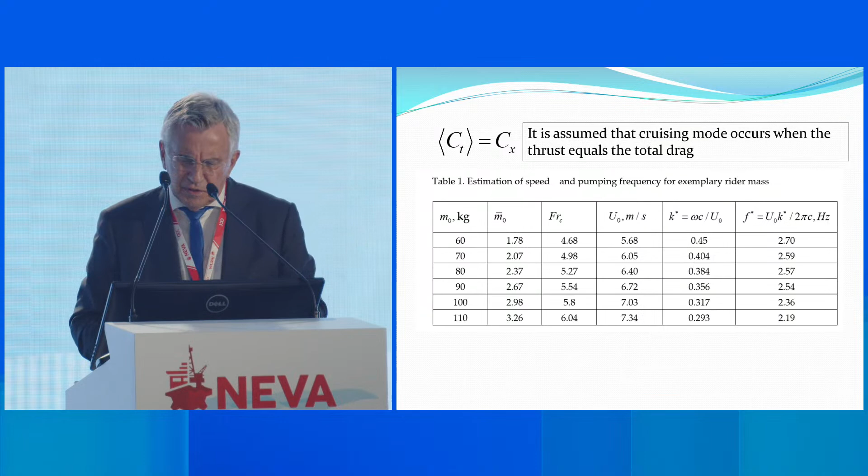So if we look at that, then we can also use a robot instead of a rider. And we would be able to use that to create the force of the drag and use different kinematic equations to ensure that. Well, this is the overall idea. There are more exciting ideas, of course, and more detailed ideas.

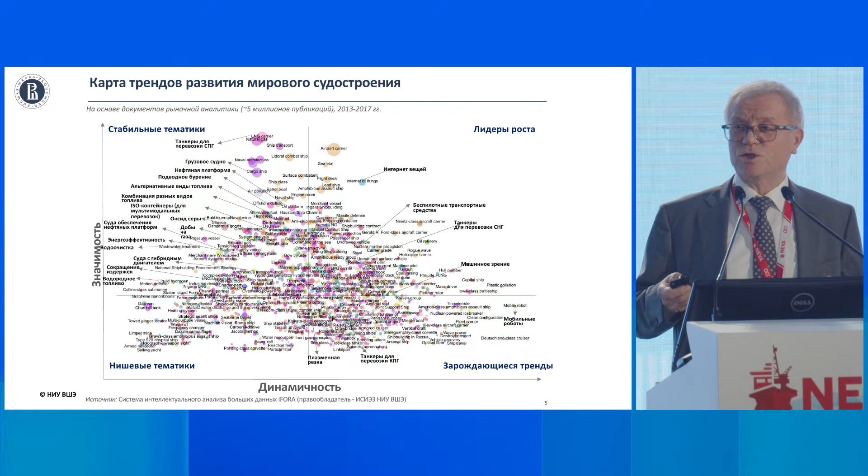And it helps us to define not only major technologies, but it allows us to take a look at trends like growth leaders, or emerging trends, bottom right corner, trends where we don't feel a lot of value, but this value grows exponentially. Those global trends can be broken down into quite narrow subjects. I'll not elaborate on that because I don't have much time left. Each trend is detailed into smaller trends, and their impact on technologies, on the market development, is being analyzed separately.

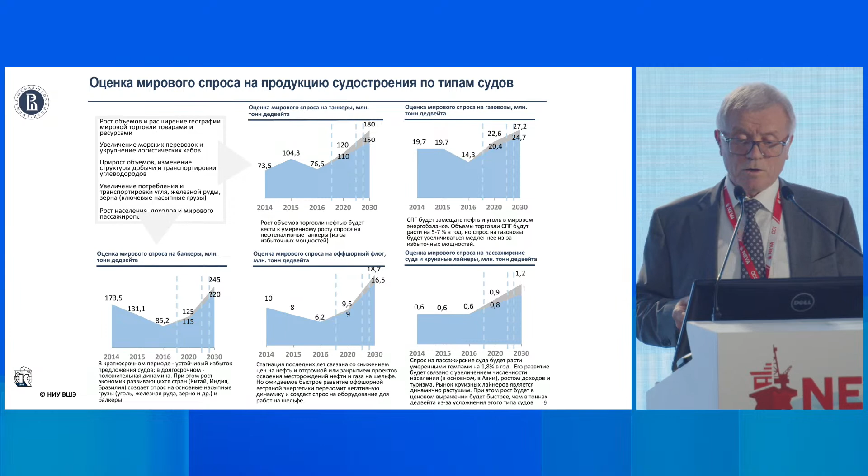These are pictures from our forecast together with Krylov Institute, and we were wondering what new types of ships and new technical solutions could potentially emerge in future. Next step is the market evaluation. We evaluate the global shipbuilding market. These markets are detailed, and for instance, for several types of vessels, we evaluate separate markets, and till 2016 we evaluated existing markets, and then we had several bifurcations.

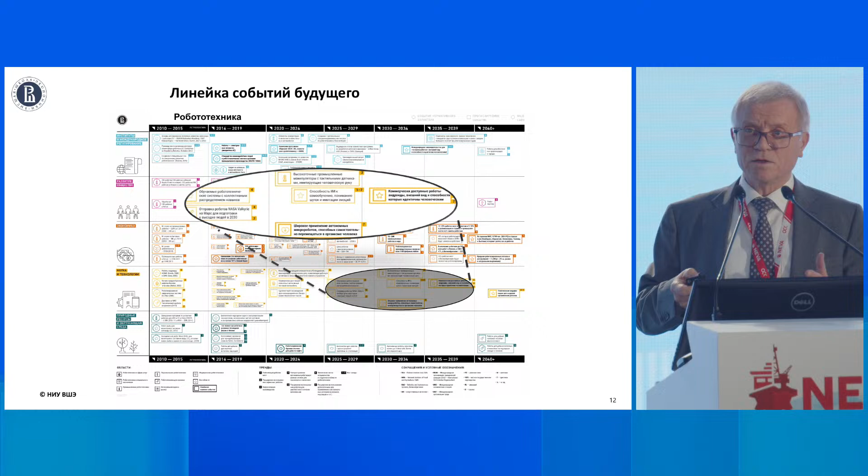Another result is the line of future events. This is an example from robotics, not the up-to-date one, but those are events that happened or that will happen. And this picture, well, it's an A3 format. You can see an overall trend of an industry development. It is yet again a visual output that helps make decisions.

Let me talk you through strategic roadmaps. A foresight study helps you to understand the overall image of the future. The technological roadmap gives you a tool to understand the trajectory, how to achieve this future. It could be a company, an economy sector, a group of companies. So it accomplishes several functions like forecasting of the market niches, of the market image, the future deviations. You can take strategic investment decisions based on that, and you can ensure project management as well. Technological roadmaps could be completely different for R&D or comprehensive ones that bring together different ideas. Managerial is possible as well.

Main stages, as in foresight, we start with trend definition. Then we analyze the markets, we analyze the alternative sources of consumer characteristics. When you see the market and the products separately, you understand that the same tasks can be solved using different products. And based on this fact, you can evaluate whether your industry is in danger or not, because your competitors do something new and you don't, and what your competitors think is more interesting for the consumer. And the analysis of existing products. It's a visual representation.

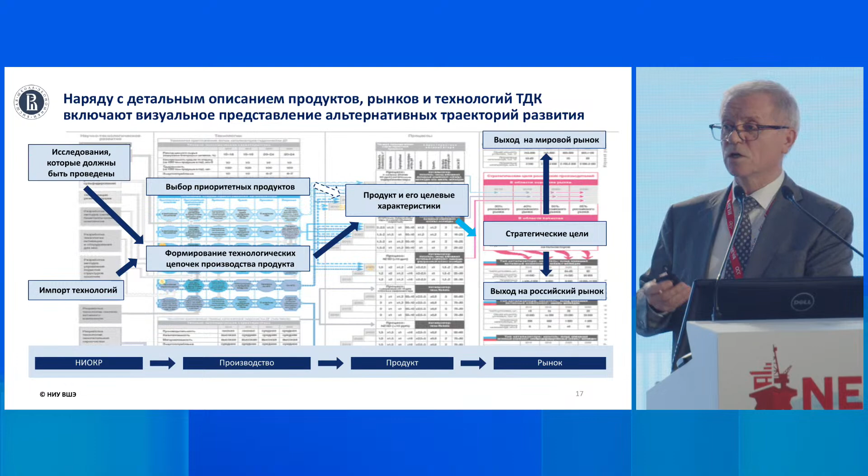We have done more than 100 different roadmaps for many different industries. The map should be created from left to right and read from right to left to define the markets and the products that could be successful. An important task is the import substitution. Technological roadmaps can be used in order to evaluate import substitution probabilities and possibilities, to see what we are lacking and what tools should be used in terms of management and cooperation with vendors. It's easy to use, it's flexible, it has qualitative and quantitative analytics, and in 15 minutes you can convince anyone or explain the future steps.

Let me talk about our iFORA system. We've been developing it for more than 10 years. It's a very important system. It has more than 800 million documents with all patents, scientific papers, academic analysis in order to evaluate skills and competences, which skills and competences should be given to employees to be competitive at a labor market. We use it actively. We implemented more than 100 foresight projects in terms of AI or artificial meat, Gazprom's projects, oil and gas development, shipbuilding, ship construction. This concludes my presentation. If you want to have more details in an informal setting, I'm ready to do so.